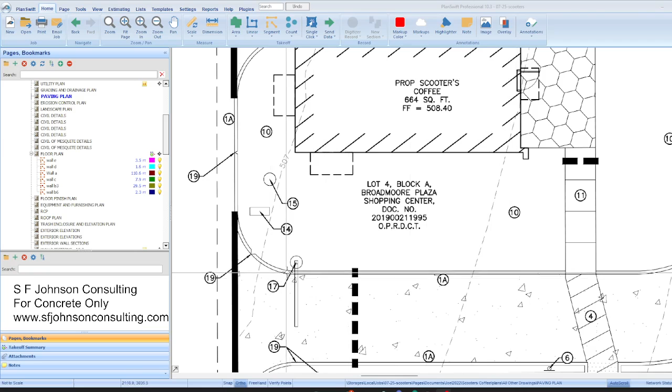This is a coffee shop, so we have a very small plan, easy to review. This is our site plan, and we know our driveways, walkways, and curbs - we have to measure all of that.

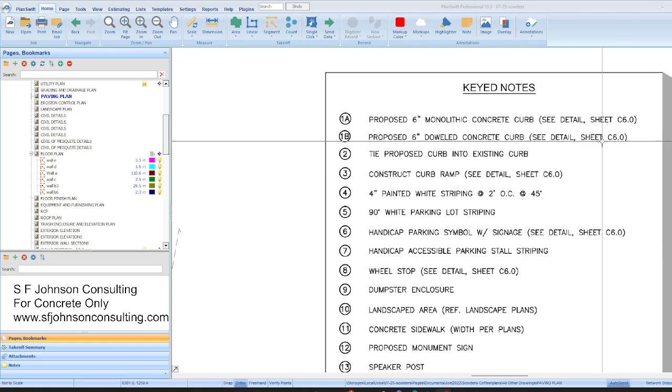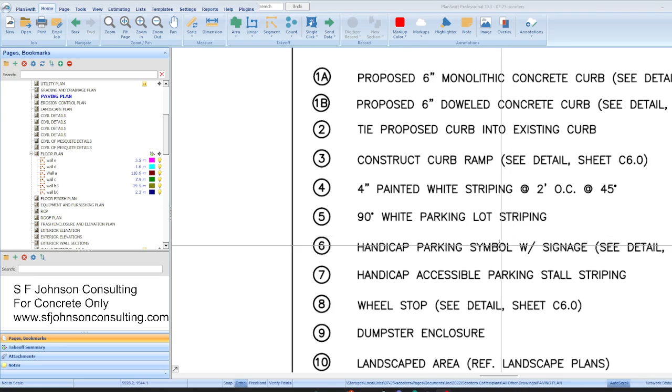The keynotes say doweled concrete curb. What's the dowel? We got to look at the detail. We have to look at all the details, and the civil set's going to give us everything - painting, the concrete, the symbols - but we're only looking at our concrete scope of work.

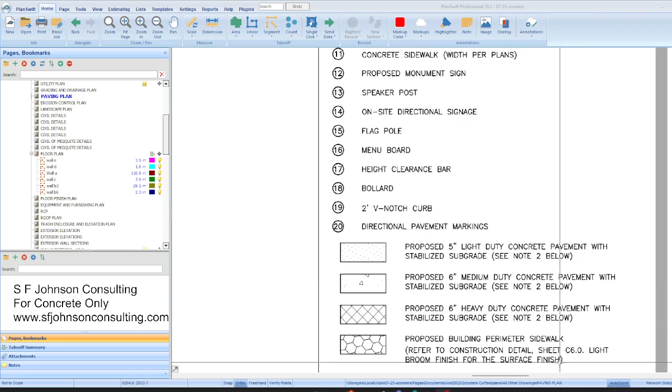So we are only looking for everything related to our concrete scope of work: 5-inch light duty concrete pavement, 6-inch, 6-inch heavy duty, medium duty, light duty sidewalk. So what we're going to do for our purpose is just get a square foot total for everything and a linear total for all of the curved curbs and straight.

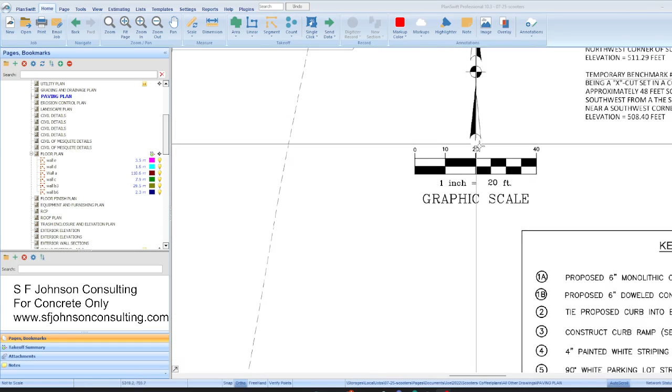And then we're going to come back and see what the takeoff looks like. So all concrete, and we can start here. Of course you got to start by knowing what your scale is. On a civil set, the scale is always somewhere special. Here we go - for every inch it's 20. 1 equals 20, I agree.

And then now I can use this - no, I don't want to use the segment tool, let me cancel that, let's use our ruler. Okay, so between 0 and 10, this should tell me it's 10 if the plans are to scale. Now that's close enough, right?

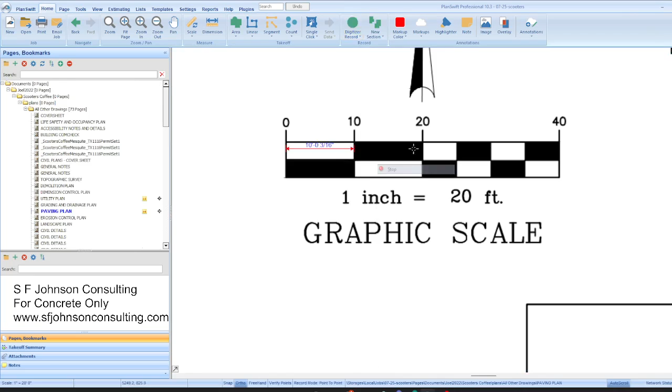All right, so I'm just going to look at my keynotes, start with what's easier, and then I'll just call it curb 1A, curb 1B. Later I'll look at what the construction of it is. And then we've got the 19 - you got to make sure you know what that is. Let's see what that is.

Okay, 2-foot V-notch curb, we'll just note that. Let's see, we go from a 1A to a 1B, and so I'm going to say curb 1A.

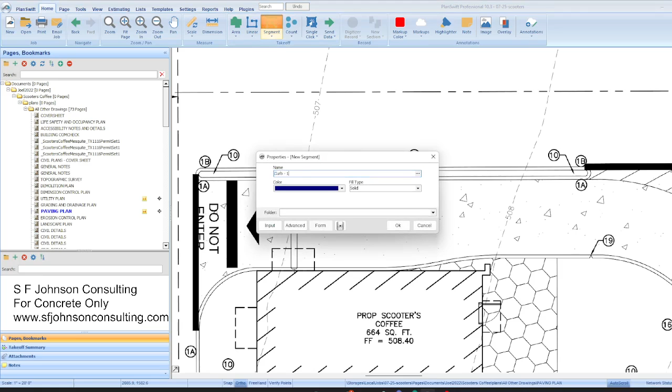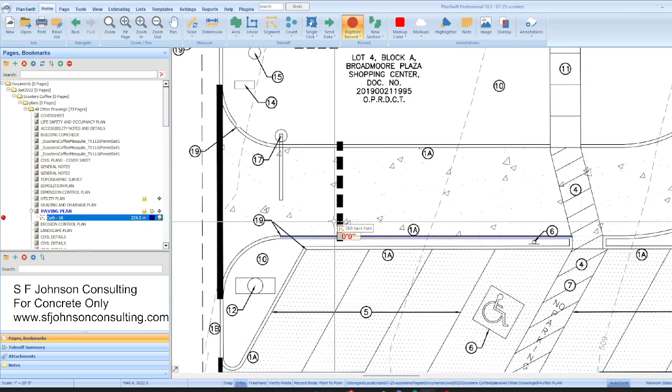And I will make this boring for you because I'm going to do it all. Boom, boom, and so everywhere where it's straight I'm going to do all my straighties. I think maybe at this point here it starts to curve out - this is a 1A, do it to here, because our formwork is going to have to curve.

And that's an extra cost for all of that and the labor involved. Okay, so we won't make this boring, we'll leave it to there for all the straights, and 1B will be the same way.

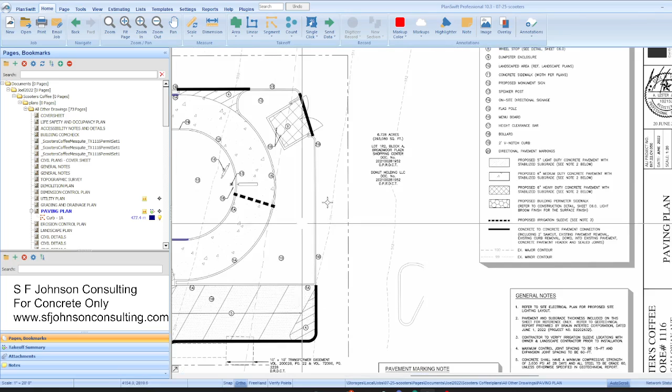Now, we need cubic yards of concrete. So what we do is we measure how many square feet and times it by the thickness - that gives us cubic feet. Divide by 27 gives us cubic yards. It's pretty much division - when you multiply by 6 inches, you're dividing in half. Same thing, and so we do with our square feet.

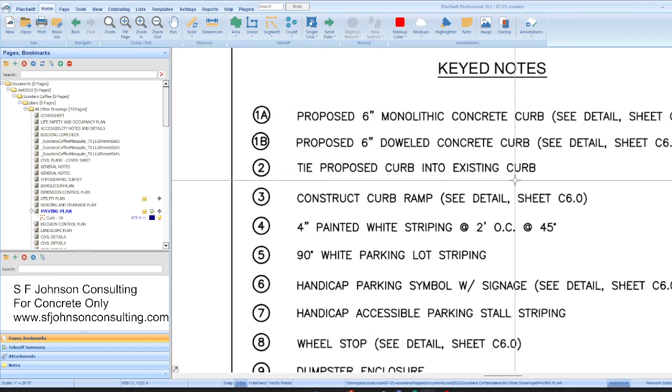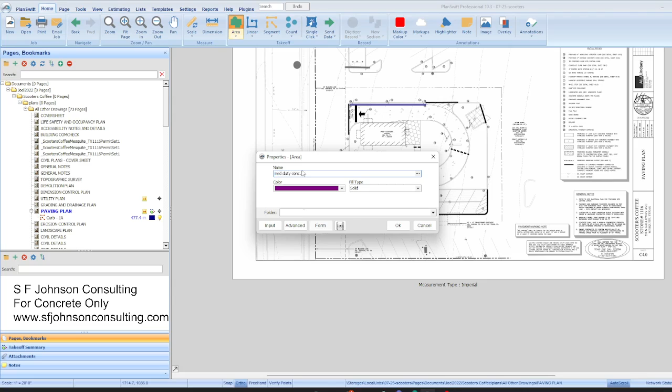Let's just do this right here, and we'll say - which one is that one? Medium duty concrete, so we got an area tool on that one. MED duty, CON - we don't have time to type a lot, we got a lot to do. So that's all of this.

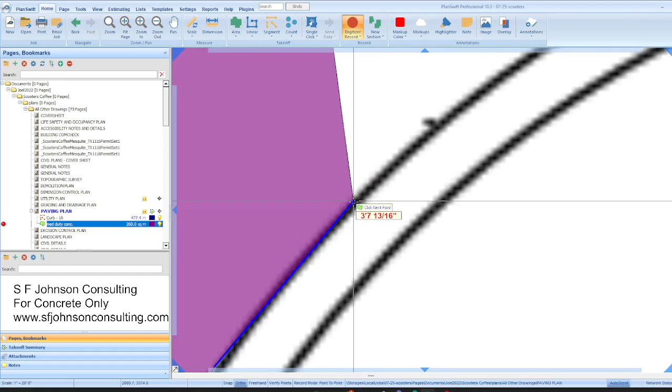And so we're going to go back and do our curved curbs, but then we're going to just do something like that, make it all nice - see, that's our curb, so we're not going to include our curb. So we do something like that, we just try to stay, and I can make it more curvy - you just got to pan in to get on the curve.

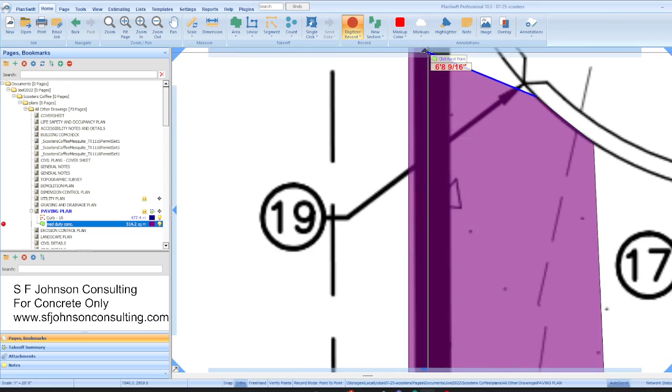Okay, so let me pan out a little bit. I'll leave it at that, let's get a little bit more over here like that, and then we're going to go like that. You know, construction - it's fun, right? It's like coloring, it's like we're coloring. It's fun when you have good tools.

We'll go a little over.

Okay, so we got the little apron, right? So if we had to do, and in a good cost book, you're gonna have a different cost for the driveway apron. That's what that is, right? So how many square feet is that?

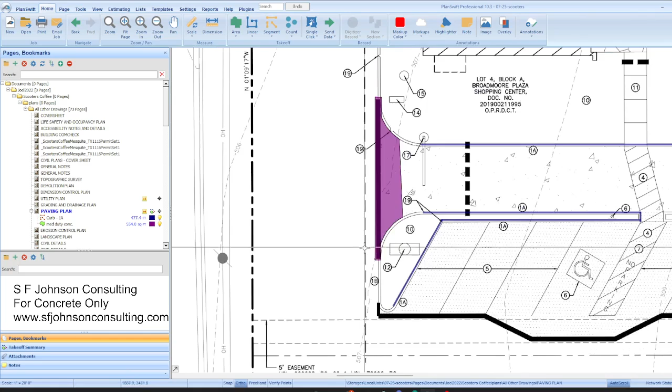Oh, 554, and times 6 inches, right? So we would basically divide that in half, 250 plus another 25, whatever, cubic feet, and then divide that by 27 for cubic yards, because you buy concrete in cubic yards.

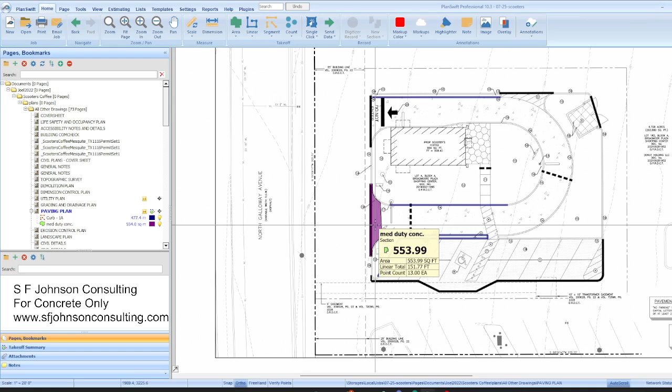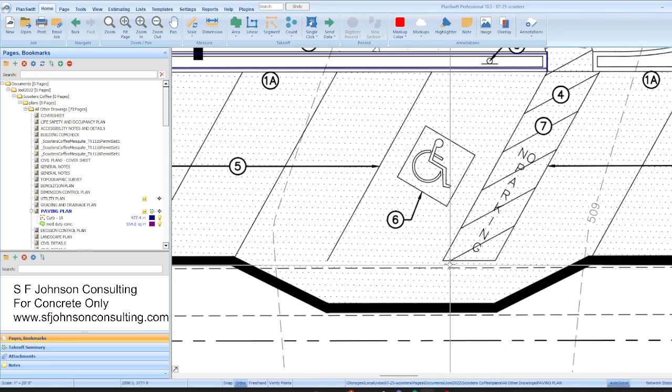All right, so we'll just do that all over the place, all over this set, for either this concrete pad or this one. We don't care about the striping because we're not doing that. Okay, if we were doing that, then we get our linear tool and measure, because it's to scale. So whatever I'm measuring here, I'm going to be measuring all concrete.

Now, we have to go to, because from our plan view, right, we only see the plan view. We don't know the reinforcement details. We don't know anything else, okay? So we have to make sure we go see the note below.

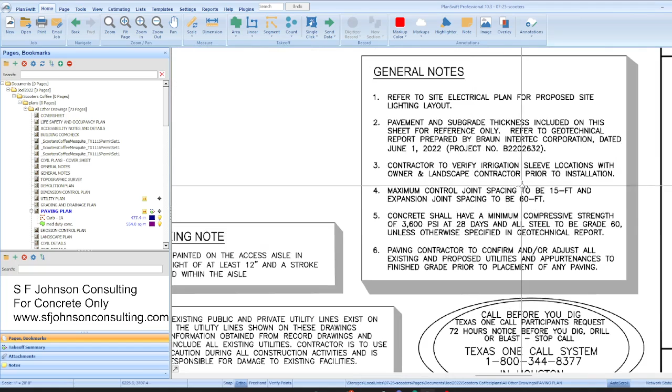15 feet, control joints. How would we do that when it's not shown? Pretty much this is how you do it. Control joints in any area, what you're going to have to do is take your segment tool, because it's not shown, and I'll call it CJs. I'm just going to have to go from one end till I get to 15. Stop it there.

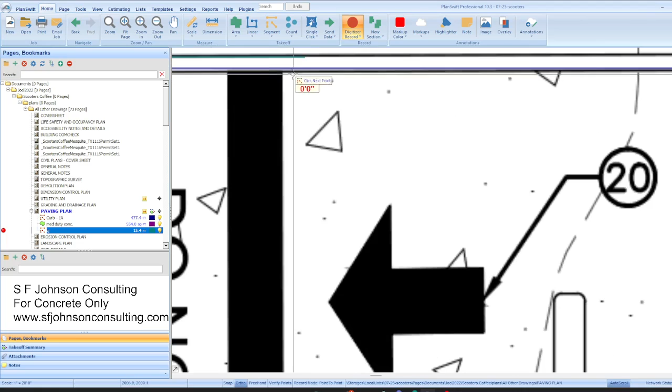Okay, and then the control joint is this way. Same thing, every 15 feet. I can stop it here. I mean, you're not going to be exact, but you are going to be close enough.

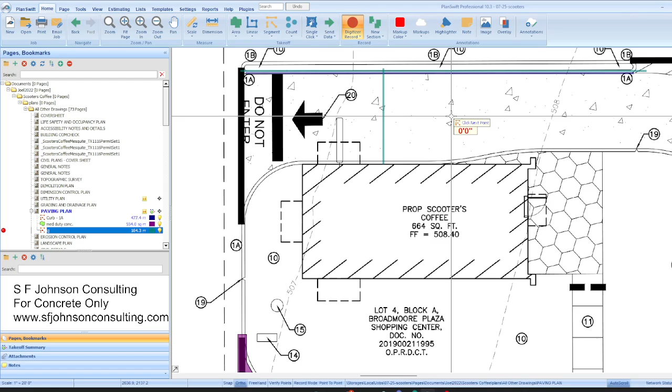Or you could just measure the whole thing, divide by 15. Right? Divide by 15, do the whole thing, divide by 15. Because that tells you every 15 feet we need one. And then just do whatever this is, 30 feet. So divide by 15, if I got 15 of them, 15 times 30 feet, that's the length of the control joint, because you got to measure your control joints too. And if they're not shown, that's the best way to go about doing it.

Okay, so that would be for our civil set. And then we go to our, we'll do the whole thing. We'll come back with all the totals.

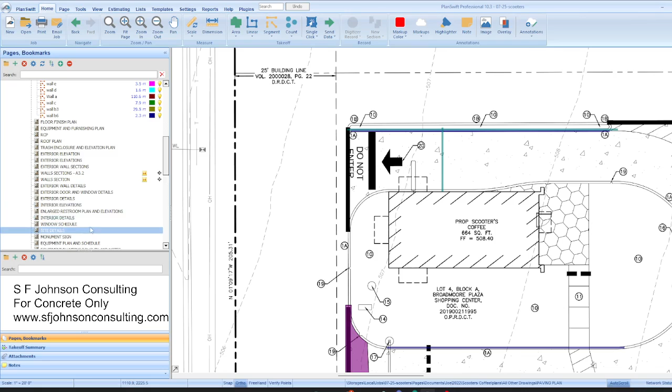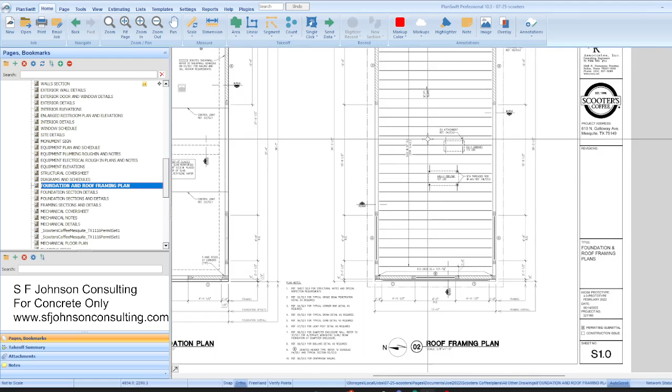So let's go to, now that I've done my commercial, let's go to the foundation plan. And this is a little project. So they have our roof, and this for roof, well, for frame, for framing only. We'll talk about that one, and what all this is, and if we have fabricated metals. Is this fabricated metals? No, it's 2x12s. Beautiful.

Okay, so here's our top of slab with number 3 bars at 18 inches. Placed one and a half inch clear from the top of slab. Provide 10 mil vapor barrier. Okay, so yeah, this again, same way we did the control joints.

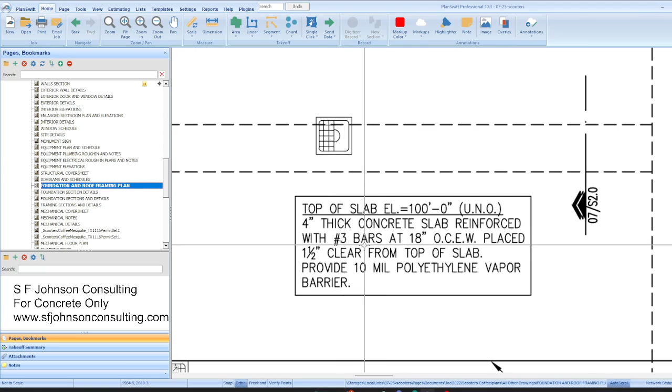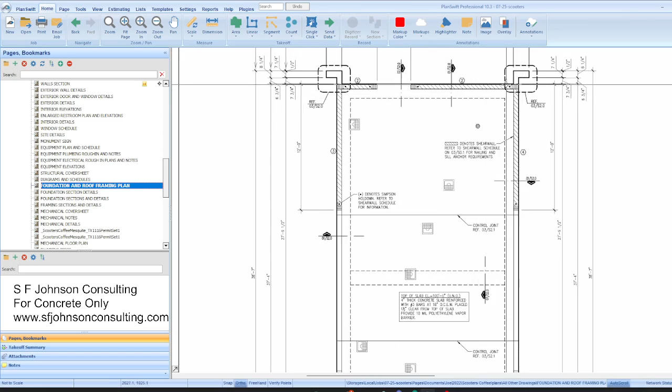If we want to get the exact linear feet of the rebar, we know we're putting it both ways, each direction, each way, EW. So we take how many linear feet for this way, because we're talking about the rebar that's going to go this way. We take however many linear feet that is, turn that feet into inches, and divide by 18. Because you're placing every 18 inches, you take that length divided by 18, and you know how many positions you have to put the rebar. But then you're going to put it this length, so that's the rebar for this length.

Opposite is true for this rebar. You measure how many linear feet, and it is 38, 39 linear feet. So we know 39 linear feet, turn into inches, divide by 18 inches. That's going to tell us how many placements our rebar is. And then those many placements times 18 feet. So you just that quickly have done your rebar totals.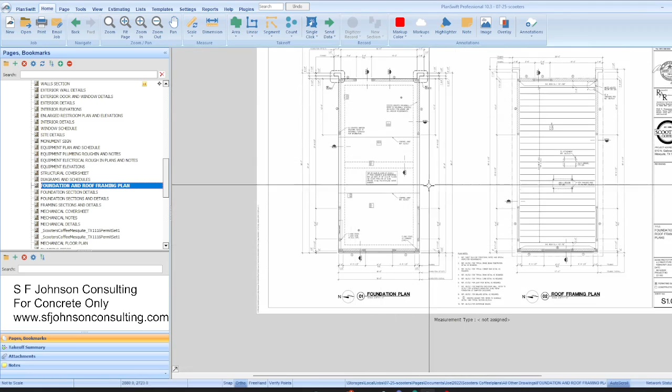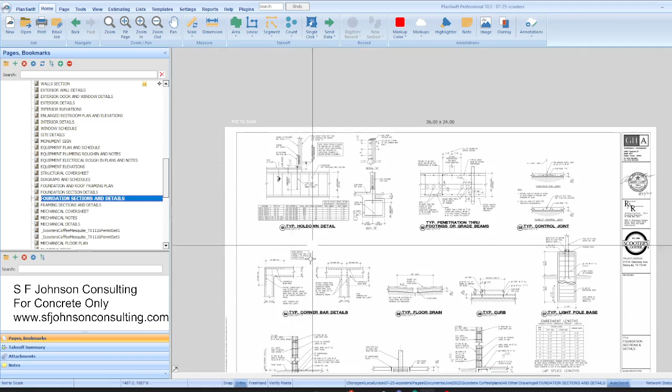Okay. And so what's our continuous footer look like? We need to go to image number 1 on S 2.0. Let's see, I knew I'd go past it. Image number 1, so that's our typical footer. Oh, that's the hold down. Wait, hold on. Oh, there we go. Wrong page. Image number 1, continuous footer. So let's do this rebar.

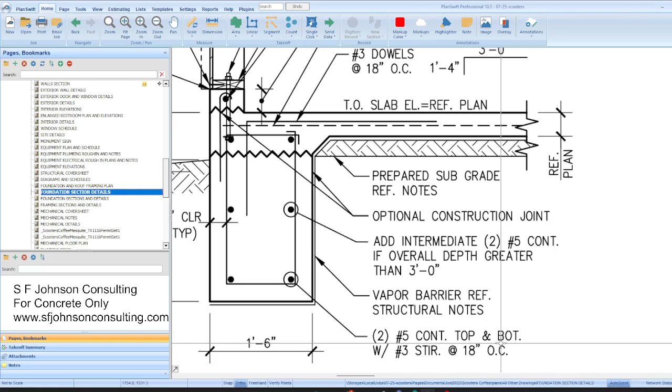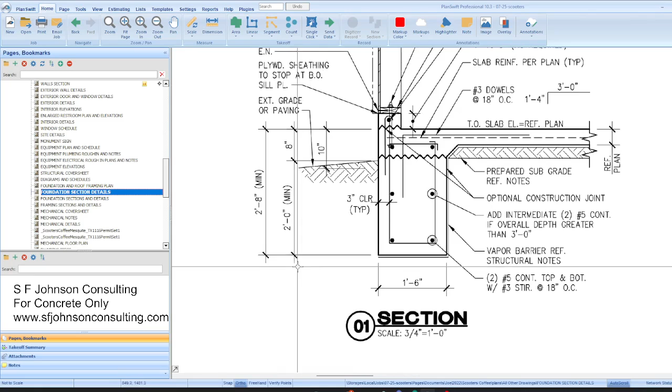You have 2 number 5 continuous top and bottom with the number 3 stirrup at the 18s. So you can figure that out. We've got to figure out how many linear feet of continuous footer first. And then our continuous footer is 1 foot 6 inches by whatever this height by 2. So we can break that down by how many cubic yards of concrete, and we can determine how many linear feet of number 3 and number 5 we need. Very easy and very much fun if you're a nerd.

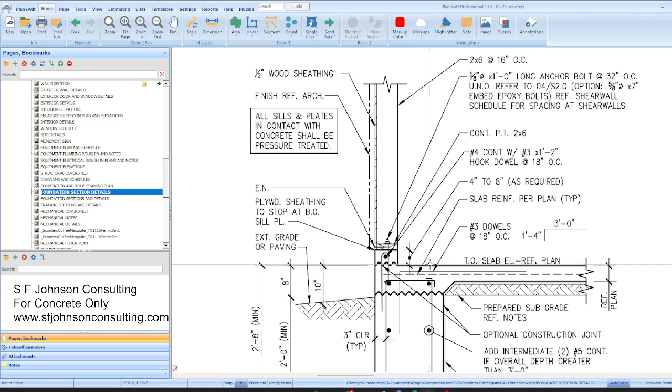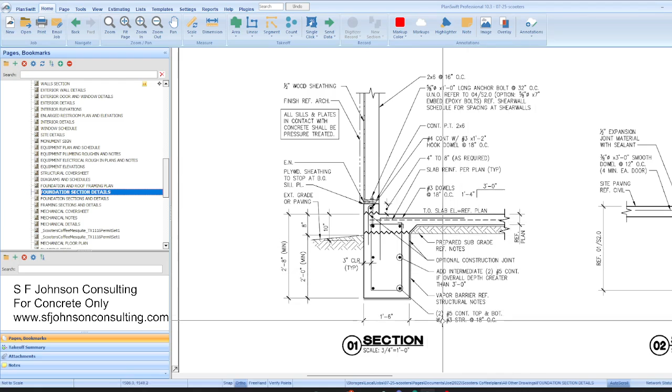Okay, so for concrete only, we've got to be able to do that for our cost estimate. Because if the reinforcement is our deal, we've got to figure out how many of these we have as well. Anchor bolts, because that's going into our concrete. That's part of our reinforcement for the structural framing. That's why they give you these section views, so you can do the math by the 18 inch, 3 inch, whatever it is, and do a very accurate takeoff. Different section views give us different information, so we've got to look at each one individually and do the takeoff based on what we see.

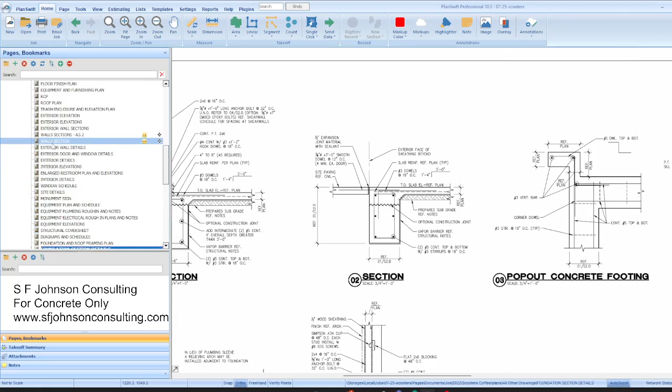So for concrete only, for this from the ground up, we're going to look at our civil plan. Civil is going to give us all of our concrete driveways and asphalt and curbs and gutters, and really the supports for all of our signs and things of that nature. All of that has to be looked at. Our support foundation for our handicap parking signs, that's part of our scope of work too. So be aware of everywhere your scope of work is going to show up, but most definitely on a ground up project, you're going to review the full civil set.

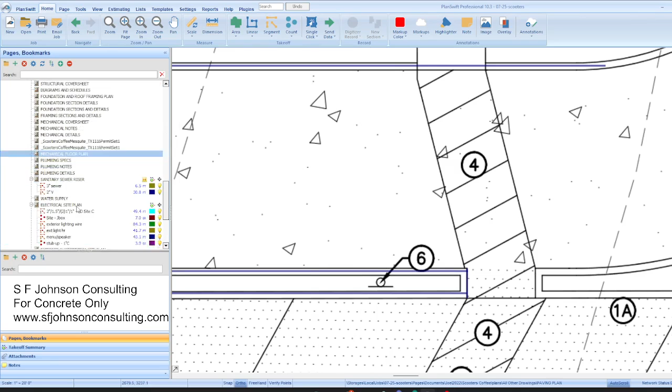And then, of course, you have the foundation, the bottom of the building. So make sure you are looking at the foundation, all the section views, so you can determine how many cubic yards of concrete as well as how many linear feet of each type of rebar and the vapor barrier. And for excavation only, we'll go over how we determine how much to cut and fill based on the grading plan and site plan, and depending on the condition of the site, we may have a site demo plan. We may be doing more than just light grading; we might have to do some serious excavation.